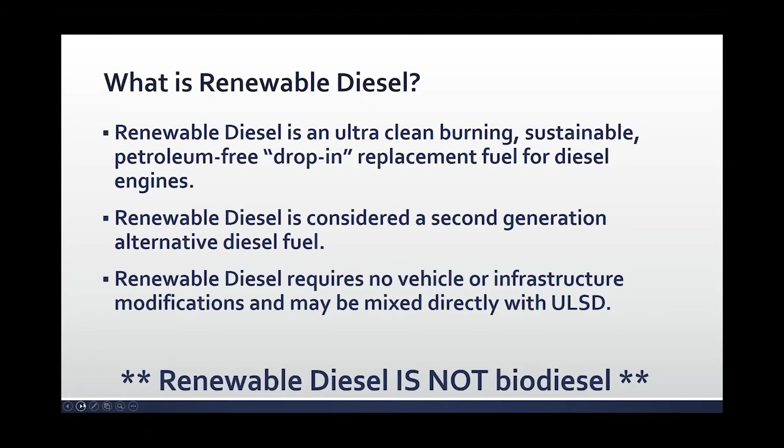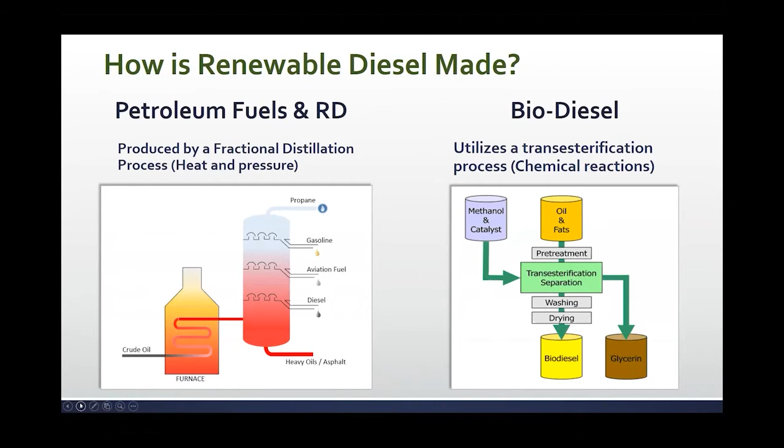But one thing to be clear, renewable diesel's not biodiesel. They're both excellent fuels. Clean Cities is fuel agnostic. There's not one perfect fuel for any situation, but we like to inform everyone about the options that are available to them. The main difference between renewable diesel and biodiesel is the production process. Renewable diesel is made in a more traditional refining process, which uses heat and pressure, whereas biodiesel uses a transesterification process, which is basically chemical reactions. But both fuels are made from the same feedstocks. When I talk about feedstocks, that's just the source of the product that the fuel is made from.

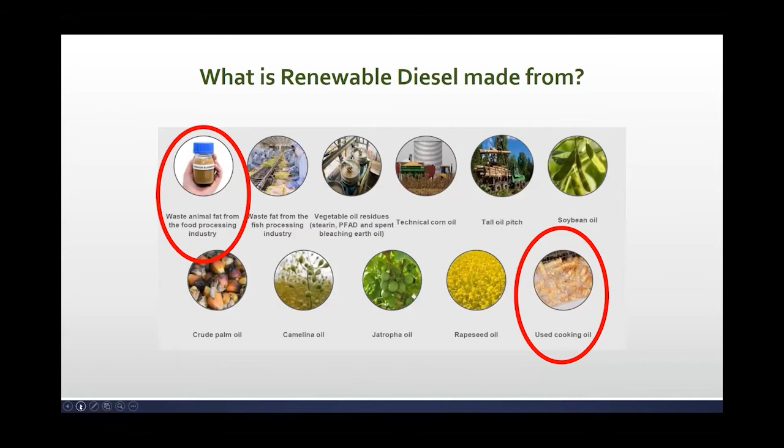These are all common sources of both biodiesel and renewable diesel, but the most commonly available versions of renewable diesel are made from waste animal fats and also used cooking oil. So these are the waste products that don't have a lot of use. Some of these are used to make soap, but it's not taking away from the food supply. There are some concerns expressed at times about renewable diesel made from crude palm oil, and I believe the industry is taking steps to address those concerns regarding deforestation. But currently in California, the low carbon fuel standard has no authorized pathways for fuel made from crude palm oil, so those fuels are not being used in California.

The unique thing about renewable diesel and also biodiesel being made from waste products, it allows an opportunity to engage in circular economy. And this is fundamentally previously known as a closed loop. That's where the waste is produced in an area, converted to a renewable or reusable product, and then brought back into the area for reuse.

In this instance, the City of Oakland is the source of waste, grease, and used cooking oil that is then taken to the renewable diesel refinery where it's turned into renewable diesel, and then that very fuel is returned to the City of Oakland for use in the City of Oakland vehicles. Again, it's a circular economy concept. You'll be hearing more about this in the future.

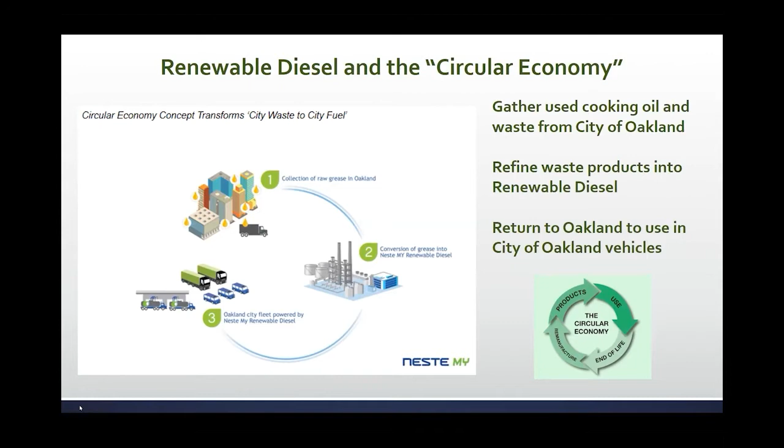Those of you that aren't really familiar with renewable diesel may have some questions. It's perceived as a new fuel. Oddly enough, it's been in use in California in significant quantities for at least 9 years. You can see by the charts, renewable diesel had been introduced into the California petroleum fuel supply as far back as 2011 to meet the low carbon fuel standard requirements of that state. So if you've been using petroleum diesel in California in the last 9 years, you've also been using renewable diesel.

It basically is stating that the renewable diesel fuel supply is projected to increase domestic production capacity, but worldwide, we're anticipated to be somewhere near 3 billion gallons of renewable diesel by 2025. And again, renewable diesel being a drop-in fuel that can take the place of petroleum diesel overnight. The market has recognized this, the petroleum fuel industry has recognized this, and there's significant activities taking place to increase production.

Again, why is this important to me? The graphics on the left are just snapshots that I took out on the street. Renewable diesel's available retail in the state of California, and not just at boutique fuel suppliers. You can see 76 has their own renewable diesel. It's branded 76. The Excel spreadsheet is a table, and it's probably not comprehensive because I made it, but it just indicates the existing renewable diesel capacity.

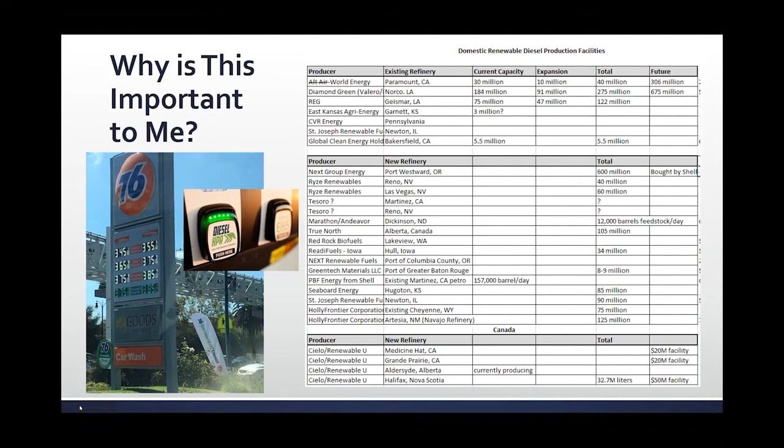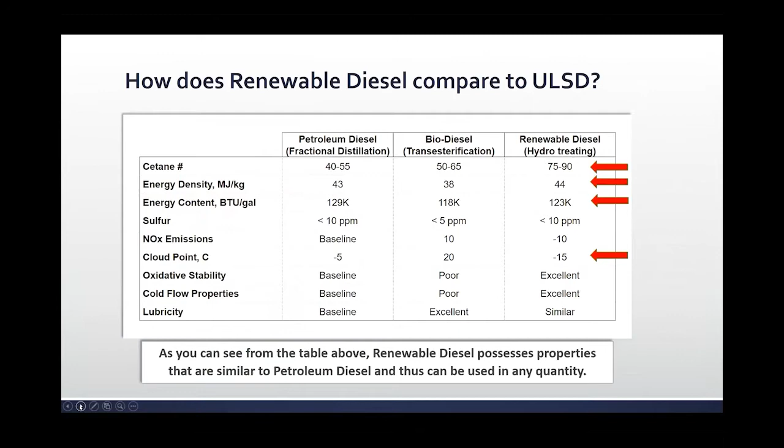How does renewable diesel compare to ULSD, ultra low sulfur diesel? Very similar. You can see the cetane rating above. It's better than petroleum diesel and biodiesel. The energy density is very similar to petroleum diesel, not a significant advantage, and the energy content is quite similar. The cloud point also, with the additives, renewable diesel can be a very good winter fuel, but you have to remember to spec the winter blend if that's the fuel that you want to use.

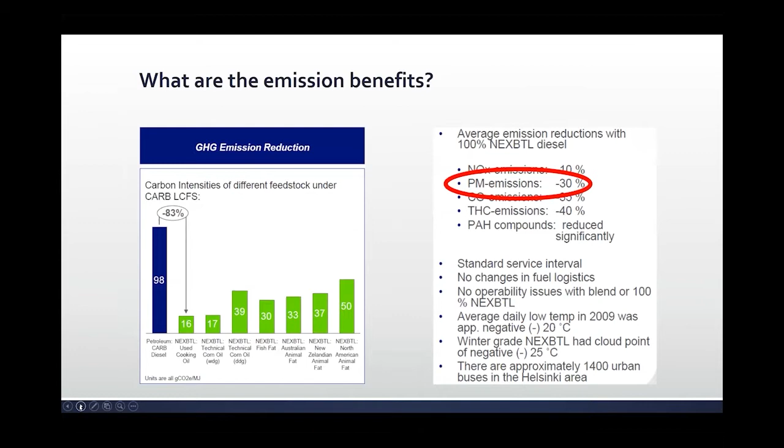And what are the emission benefits? The table on the left shows the blue bar represents petroleum diesel, and the other bars represent renewable diesel from various sources. The one most commonly used in California has a carbon intensity of about 30. So you get right about a 70% emission reduction. But more significantly, the PM emission reduction is at 30%. And that's significant because the particulate matter is a carcinogenic, and it also causes all kinds of problems with your diesel particulate filters.

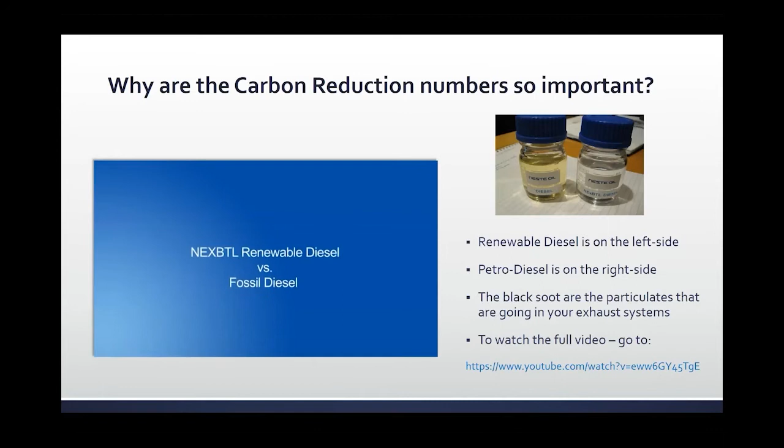So I've got a real quick little video here that visually shows the difference between renewable diesel and petroleum diesel. And these are basically Petri dishes of both products side by side, and you can visually see the reduced emissions from the renewable diesel on the left.

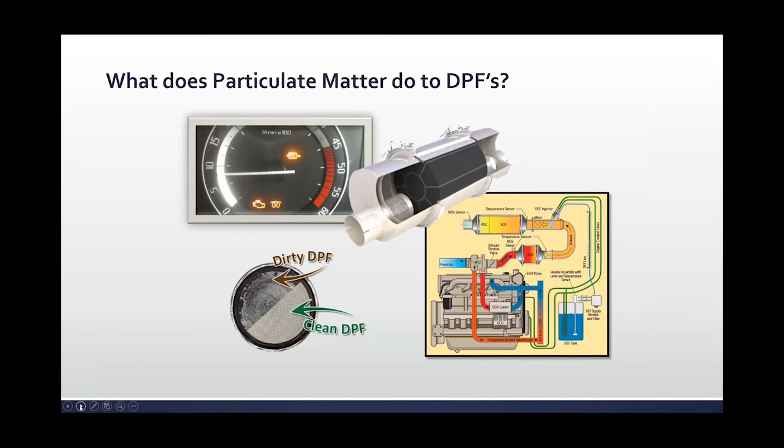So why is the particulate matter reduction so important? Those DPFs and particulate traps on your diesel vehicles are designed to keep the PM matter from entering the atmosphere, and they work by filtering it. So that PM that comes off of your engine gets trapped in your DPF. A 30% reduction in the PM going into your DPF translates to a greatly reduced need to do manual regens and cuts down on your operation and maintenance costs. We will have an additional module in the future that delves into this particular aspect.

So you might be thinking to yourself, hey, this renewable diesel sounds almost too good to be true. What am I missing?

Fundamentally, having been in the alternative fuel industry for about 20, 25 years, this is a once-in-a-lifetime fuel that comes along. There are no modifications required to use in your vehicle or your storage equipment. It's chemically indistinguishable from petroleum diesel, and the same storage and regulatory requirements apply. It cannot void any manufacturer's engine warranty because it is the same chemical chain as petroleum diesel. And it's got very competitive performance criteria such as the cetane and the cold weather clouding point.

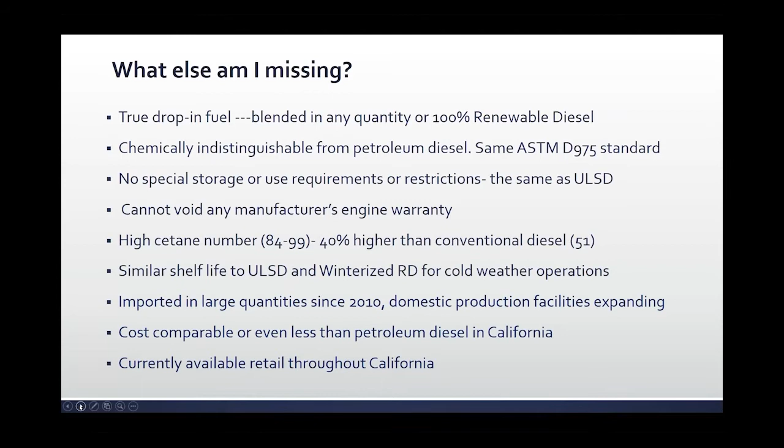It has been imported in large quantities, and to make it even better, in California, renewable diesel is cost competitive with petroleum diesel. In some instances, it's even less. And it's currently available retail throughout California. And let's not forget that renewable diesel can be blended in any quantity with either petroleum diesel or biodiesel. And actually, renewable diesel, biodiesel blends are fairly popular as well, and can actually have a lower overall carbon intensity than straight renewable diesel, depending on the source. So it's important that you do your research when you're making a selection of an alternative fuel to use.

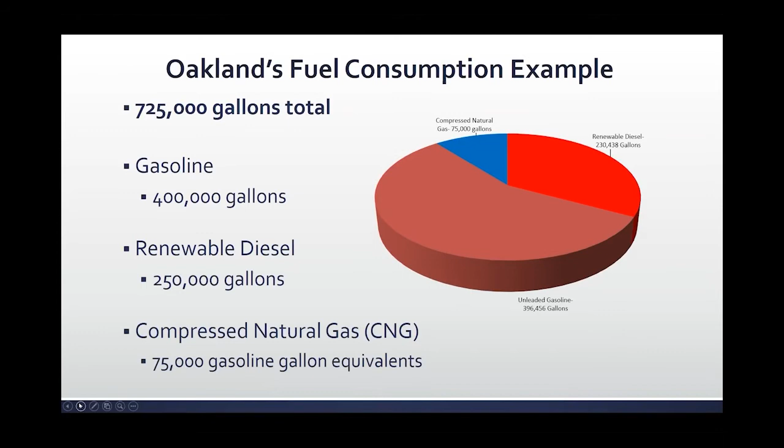Wonderful. Thank you, Richard. That is so inspiring. I especially love the last bit of the slide where you were able to just create a 50% alternative fuel use by popping in renewable diesel. Fantastic. That was a great image.

Up next, we have Dr. David Slade. He's the Executive Director of Biofuel Technology and Services with the Renewable Energy Group. I had the honor of touring that refinery a couple of years ago, and it was so impressive. And the work that they do is so incredible. And the product that they put out is top notch. So I can't say enough good things about REG. So Dr. Slade, welcome today, and thank you.

So thank you again. That was a very nice introduction. Just so everyone knows, we do produce both biodiesel and renewable diesel, and we have been marketing blends of the two successfully on the West Coast for the last couple of years. So Richard set things up perfectly for me. He actually did some of the hard work, and I'm going to build on a little bit of that. We hadn't seen each other's slides, so you'll get a slightly different version of what he said, which will help, I think, fill in the picture for everybody.

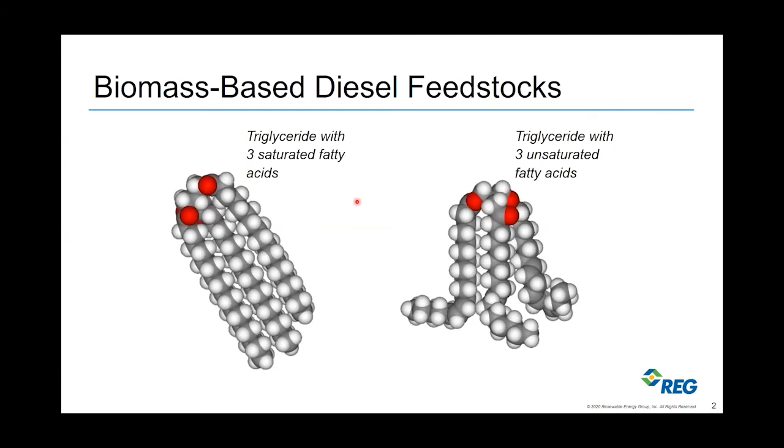So to make biodiesel from fats and oils, we start with triglycerides, and we actually react them with methanol. The reaction that Richard mentioned, transesterification, is a catch-all phrase for any conversion of one ester to another, but we basically convert glycerol esters or esters of glycerol into methyl esters or esters of methanol, and we do that by reacting this triglyceride with 3 methanol molecules.

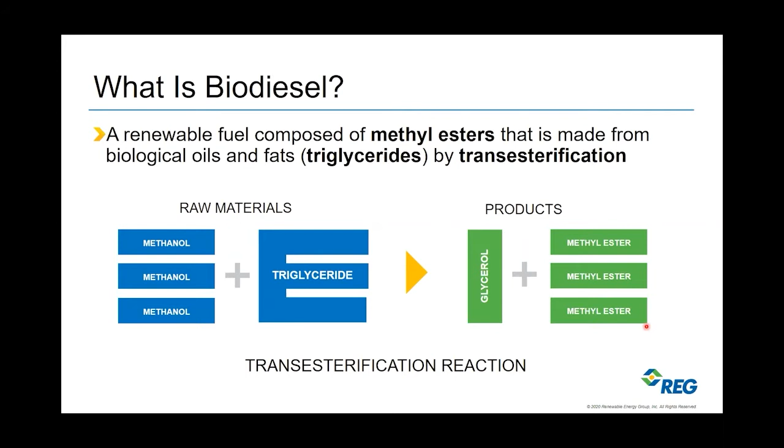The byproduct is glycerol, that has its own uses, and then the methyl esters, which are now much smaller and much lower viscosity than the starting fat or oil, becomes biodiesel or is biodiesel. Here's another molecule picture, and I'm showing you this just so that when we do the renewable diesel slide, you'll understand how we can make such a different fuel from the same starting materials.

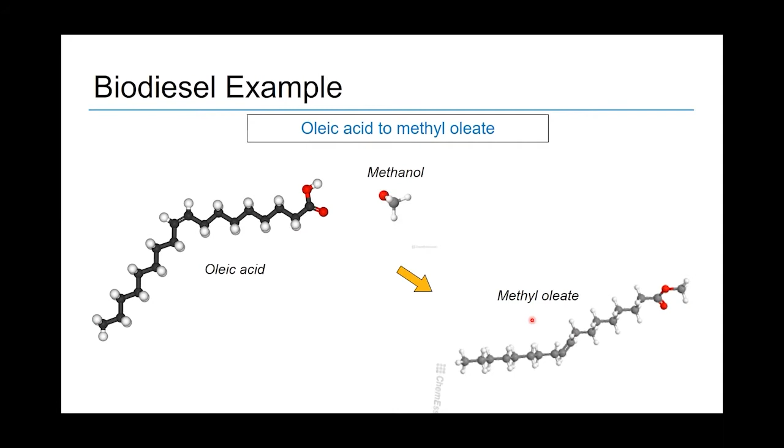So this is a fatty acid, oleic acid. It has oxygen atoms in it, those red atoms, red spheres there. We react with methanol to make a methyl ester. So in this case, it's methyl oleate. That would be biodiesel. We can make biodiesel from any oil or fat, as Richard mentioned, and I'm building on.

And the reason this matters is one of the topics I wanted to make sure to cover today was why biodiesel is different today than it was before, because biodiesel has been around for about 20 years in the US in quantity. And in the early days, we, the producers, didn't know a lot about the finished fuel and what might happen in the world.

And there were some problems, particularly in the 2005 kind of time range, where new adopters of biodiesel did have filter plugging issues. And this was largely because of the minor components, what we'll call minor components or impurities that are in the fats and oils, and those can make it into the biodiesel. So the minor components from feedstocks can impact biodiesel quality. So I don't want to deny anything people have heard about historical issues with biodiesel.

Certainly over the last 10 years, we've made very, very large strides in biodiesel quality. So that's the one thing to reassure everyone today is when we talk about biodiesel that's in the marketplace, it is actually very, very different than what was produced in the mid 2000s and late 2000s even. So quality control has been taken extremely seriously. The minor components in the feedstocks have been dealt with.

There's essentially 2 ways that it's done at biodiesel production facilities. One is by filtration, and the filtration or adsorption options have gotten much better, which means the quality of the fuel is better. And the other one that my company, REG, has been adopting is distillation. So we've been distilling our biodiesel, which makes it a distillate. And this is a very major step in the quality control arena because it gives us fuel that essentially doesn't have any of the minor components that were concerns back in the day.

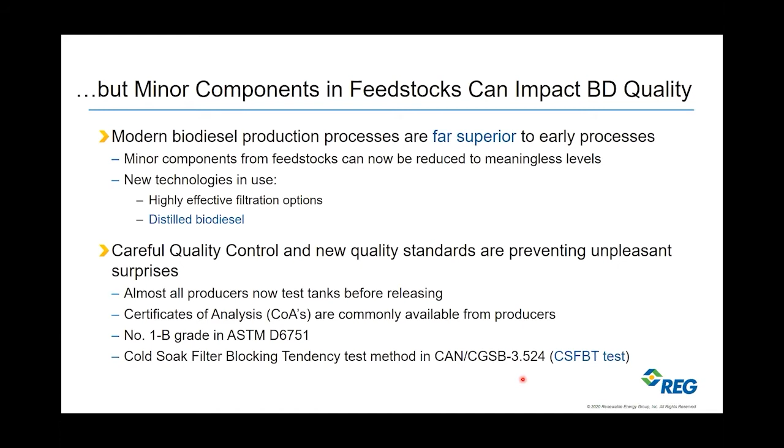It's not in the ASTM method and it's not required, but it is an available test that can be referred to in a purchasing standard. So just know that there is a way to kind of guarantee biodiesel quality control even beyond what ASTM allows. The benefits of biodiesel are mostly related to the fact that the fuel molecules still have oxygen in them. So that gives a different kind of emissions reduction than renewable diesel can offer.

Oxygenated fuels are really good at reducing hydrocarbon emissions because you get such good combustion and because they're not hydrocarbons themselves. And then the particulate matter reductions are even more dramatic than those with renewable diesel. Also very good at reducing carbon monoxide, which occurs when combustion occurs with not enough oxygen. So just know that the fact that biodiesel is an oxygenate actually gives it some unique benefits that we can't get any other way.

And then the other thing that those oxygen atoms do at the top of the molecule is they give it its excellent lubricity. It adds a little bit of polarity to the molecule, which makes the lubricity off the chart. So biodiesel is actually a better way of getting lubricity into your fuel than the conventional lubricity additives, whether your hydrocarbon fuel is petroleum diesel or renewable diesel.

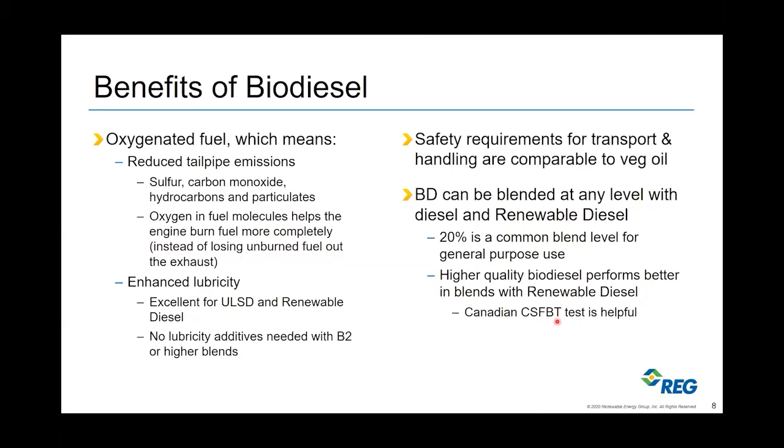Biodiesel is a very safe material. When it's in B100 form, it is essentially vegetable oil from a transport and handling standpoint. And as mentioned by Richard, these three fuels, biodiesel, renewable diesel, and petroleum diesel, can all be blended at any level that the customer wants to use. 20% is a common blend level because that's where the ASTM standard for blended biodiesel stops. But we do have quite a few customers who use more than 20% biodiesel. And once again, I want to highlight that Canadian CSFBT test if you're concerned about biodiesel quality in your blending. So that's biodiesel and the unique benefits of it.

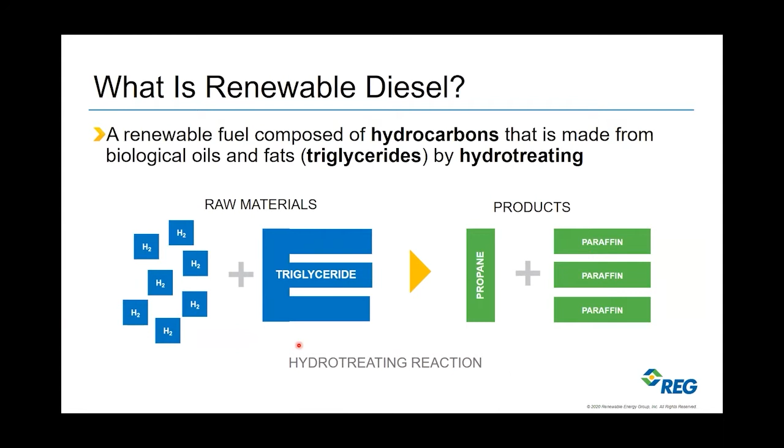Renewable diesel, as Richard touched on, is made from a different process. It's actually made by conventional hydrotreating processes that are used to remove sulfur from diesel fuel. When you react that same triglyceride with hydrogen, you end up making 3 hydrocarbon molecules, in this case paraffins, from the fatty acids. And instead of making glycerol, we make propane. So there is a small amount of renewable propane that's a byproduct of renewable diesel production. Some refineries are set up to combust that on site to lower the carbon intensity of their process. Ours, I believe, is the only one in operation today that was designed to make the propane as a separate product.

Hydrotreating takes that same oleic acid feedstock molecule and reacts it with hydrogen. Our little dumbbells here are hydrogen atoms. When you do that, you remove the oxygen atoms as water. Remember that those oxygen atoms gave biodiesel its unique benefits. But by removing them, you change the molecule into a hydrocarbon. So that makes it identical to the definitions for hydrocarbon fuels in ASTM D975, which is the diesel spec. You also saturate this double bond. I won't go into the detail there, but what it means is this paraffin, as produced by hydrotreating, has a very high melting point.

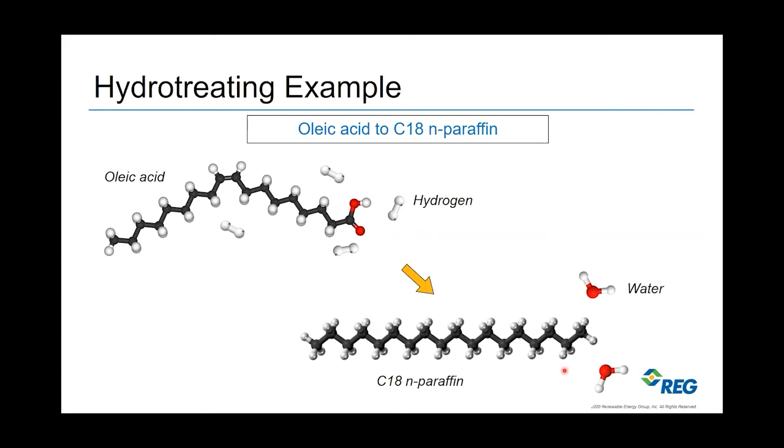So there is a key additional step that has to be done in renewable diesel production. If not, you end up with a very paraffinic or waxy fuel. That last step is isomerization. All the standalone renewable diesel producers today in North America do isomerization as well, which is what lowers the cloud point to the levels that Richard referred to. So crude fat or oil is hydrotreated to make a very clean burning, but very high cloud point material. This is white looking because it's frozen. It's solid at room temperature. But then we isomerize it to make a low cloud point finished renewable diesel.

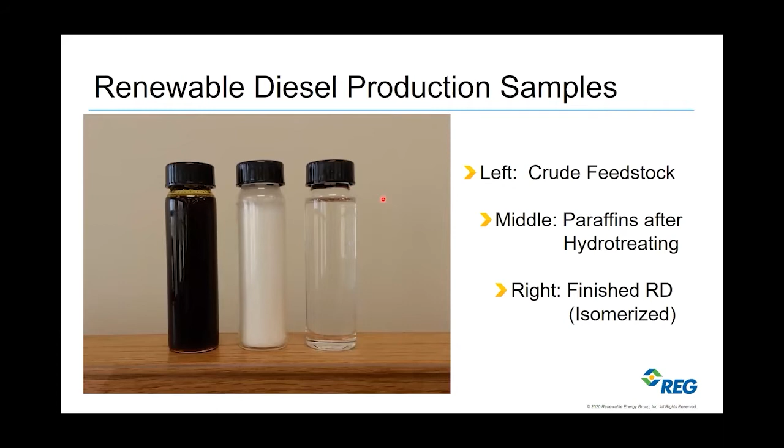So renewable diesel at a high level is categorized as a paraffinic fuel. It's isoparaffins, as I mentioned last slide, but a paraffinic fuel. That's what gives it such a high cetane number. We guarantee it, everyone guarantees it, above 65. In reality, it's closer to 80, or above 80 even, and that cetane number is an indicator of combustion quality. So you get really clean burning, nicely burning fuel.

It's a hydrocarbon fuel. That cetane and the paraffinic, hydrocarbon nature of the fuel gives it extremely low NOx. So biodiesel is better for particulate matter and hydrocarbons, but renewable diesel is much better for NOx. And it also, of course, has very good particulate and carbon monoxide reductions. And it's hydrotreated so deeply it has no sulfur to speak of.

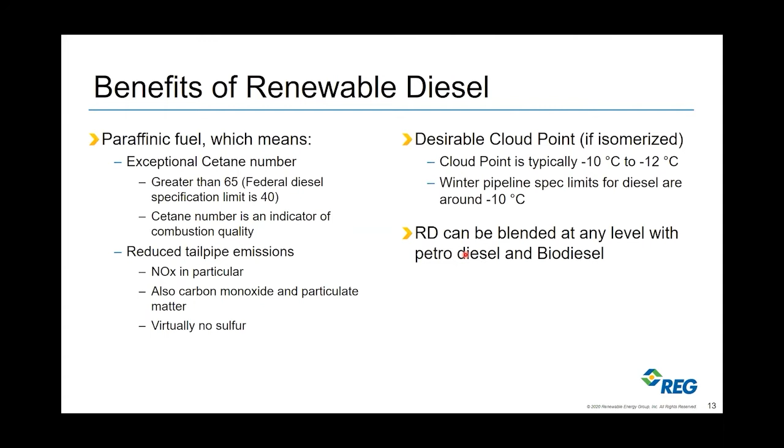Cloud point is very good. Some renewable diesel does go as low as -15 and it can even go lower. Most of the fuel in the market that is moving into California and the West Coast right now is in that -10 to -12 C range, but Richard is correct, it can go lower. And then of course we can blend it with biodiesel. So this is kind of the high level summary slide. We start with animal fats and vegetable oils, used cooking oil, animal fat.

We can react them with hydrogen to make paraffins, which is renewable diesel, or we can react them with methanol to make methyl esters, which is biodiesel. The biodiesel still has the oxygen, and our co-products are a little bit different. Renewable diesel meets the diesel spec, D975. Biodiesel meets the biodiesel spec, D6751.

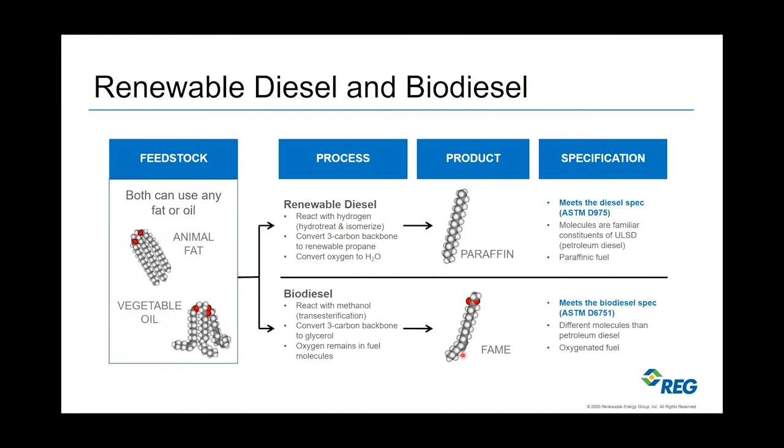So given the fact that these fuels are different and that the molecules themselves are slightly different, even though they're actually really similar in many ways, but that oxygen is a big deal, we thought it seemed like a natural marriage to blend them together, because then you can actually get the benefits of each of them. They are complementary benefits. You can't get the same benefits from renewable diesel that you get from biodiesel and vice versa.

So we have a line of products called REG Ultra Clean or REG Ultra Clean Diesel, which are blends of biodiesel and renewable diesel that are available right now. We have a lot of customers using 20% biodiesel and 80% renewable diesel in California. In Oregon and Washington, we have some customers using 50-50 blends of the two. And then I'll show in these emissions benefit slides what that means.

So when we talk about emissions reductions, these slides are showing reducing emissions compared to petroleum diesel or ULSD. So a bar that's bigger is a larger reduction. Straight R100 is the blue bars on the left. So good hydrocarbon reductions, but the blends, as we add 20% biodiesel and then 50% biodiesel, we get big dramatic increases in hydrocarbon emissions reductions. Now, modern Tier 4 engines have emissions control devices, so this will not represent what comes out of the tailpipe of a Tier 4 engine.

It is what comes out of the tailpipe of an older engine, but it does represent what goes to your emissions control devices in a Tier 4 engine, and Richard touched on that. So we are not sending nearly as much particulate matter to the DPF, and we're not sending nearly as many hydrocarbons to the oxidation catalyst. So there are some benefits just by not loading up your emissions control devices, even for Tier 4 engines.

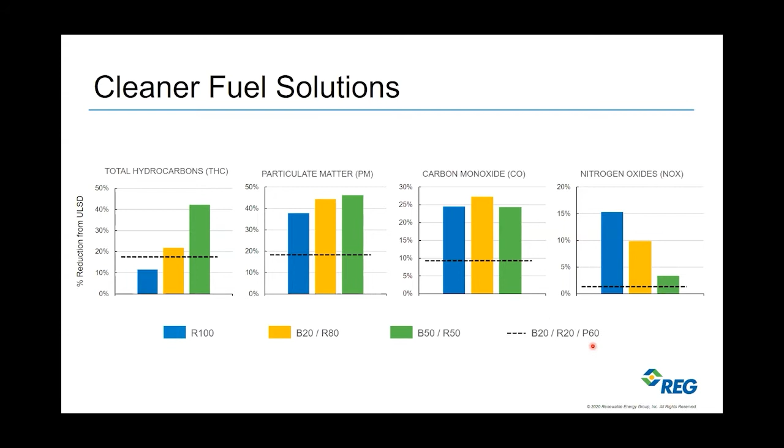And then this dashed line is what would happen if someone were to take 50-50, B50R50, and blend it with petroleum diesel to a B20. So that's a B20, R20, P60. And in markets where there's a premium price for renewable diesel or scarce supply, this could be a very interesting fuel for folks because it's 40% renewable and it has really good emissions reductions, and it's a very nice fuel to use.

Lubricity benefits, the other one I want to touch on here. It's important to note that renewable diesel is a great fuel, but it does have less lubricity even than old-fashioned petroleum diesel. So it does require lubricity additives, just like petroleum diesel. The best lubricity additive out there is biodiesel. At 2%, we get comfortably below the D975 maximum.

And as we approach 20% biodiesel, we actually approach the wear scar value for B100. So really, by the time you get to about B20, you're almost as good as straight biodiesel, which right now is the best lubricating fuel available on the marketplace. So just know that the advantage of this is you don't need additional lubricity additives. Also, by adding a fuel component to provide your lubricity, you do not need to worry about whether that lubricity additive got mixed uniformly throughout your whole fuel supply, because the fuel itself is providing the lubrication.

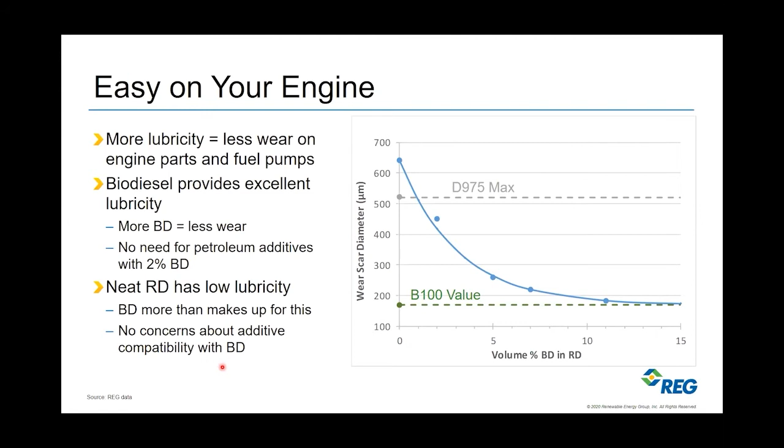And then the last unique benefit I wanted to touch on before I move to my summary is that biodiesel blends with renewable diesel actually have a surprising advantage. We have been looking at REG at freezing point for years as an indicator of cold performance. Cloud point is a very conservative indicator, but freezing point is even more conservative.

When people say, what do I need for my fuel to start it up on Monday after my school bus sits over the weekend? We have struggled with cloud point because cloud point sometimes is a little bit too optimistic. The jet industry, the airline industry, uses freezing point. Freezing points are typically 3 or 4 degrees Celsius or 7 or 8 degrees Fahrenheit higher than cloud points.

So one of the things we realized early on, and it was a little bit dismaying until we saw that we had a solution for it, was that even though renewable diesel has a very low cloud point, its freezing point is actually kind of high. And that has to do with the paraffinic nature of the fuel and the fact that it doesn't have some of the components that diesel fuel has in it.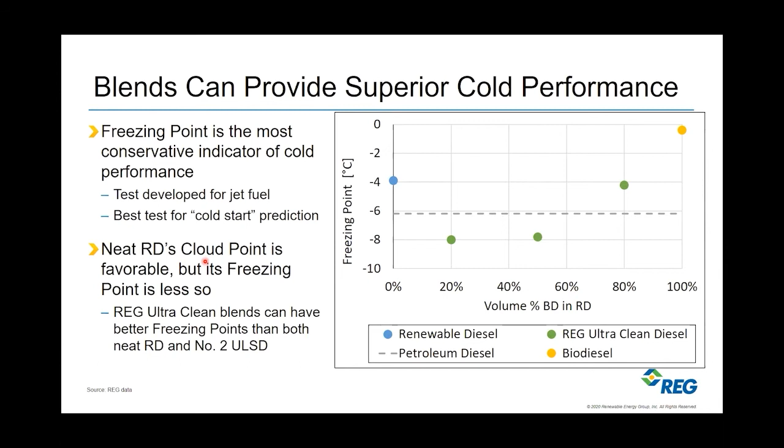Now, this would not apply to all biodiesel, but it does appear to apply to all renewable diesel. So lower cloud point or lower freezing point biodiesel can actually reduce the freezing point of renewable diesel. And that's a very interesting finding. So just keep that in mind, that even though B100 has a high cloud point and is not a good winter fuel for most folks, some amount of biodiesel can actually have a depressing effect on the freezing point. And I'm also promoting the idea of using freezing point as an indicator of your fuel storage concerns.

Final slide here, just know that we have these performance benefits of biodiesel and renewable diesel, that they are synergistic, meaning the two go together. Biodiesel provides great properties for lubricity, also elastomer compatibility, very low PM and hydrocarbon emissions, while renewable diesel is the highest cetane fuel available and amazing NOx reductions. Blend them together to get the best cumulative or overall engine emission reductions. Freezing points can actually be better, surprisingly, than straight RD. And of course, you get that amazing lubricity benefit.

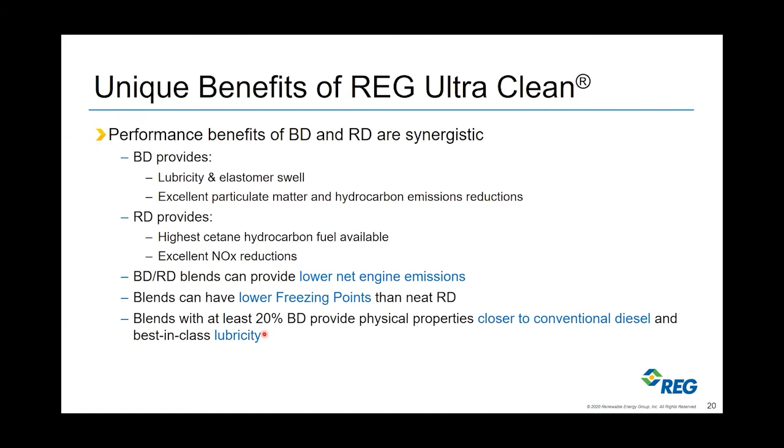And you know what? I remembered I do have one more, because I think of emissions usually as tailpipe emissions or engine emissions, but greenhouse gas emissions or carbon intensity reductions is what people on this call I think are really interested in as the Clean Cities folks. So this is the same kind of information that Richard showed, just broken out in a little bit more detail to compare to different transportation options.

So petroleum diesel in California has a carbon intensity of approximately 100 grams of CO2 per megajoule. Best in class biodiesel for REG at least, we have a 12, which is an 88% reduction. Our renewable diesel is 19, which is an 81% reduction. This depends on feedstock and production technology, so it's certainly possible that renewable diesel could have better scores than this from other producers. But just know that these are both above an 80% reduction versus petrodiesel. Natural gas is not a renewable fuel, but it does have lower carbon because it has more hydrogen in the molecule. It provides only a 21% reduction versus petro.

And electric vehicles, at least with the current US grid, are actually not better than biodiesel and renewable diesel. That's the main thing to show here. Now, there could be jurisdictions like the state of Washington where they have a lot of hydroelectric power and your electricity is renewable. Of course, that would lead to a larger reduction. But the current US grid average gives approximately a 34 carbon intensity or a 66% reduction. And that's actually with a favorable EER of 5. So just know that that's a favorable number. That is not putting the thumb on the scale there.

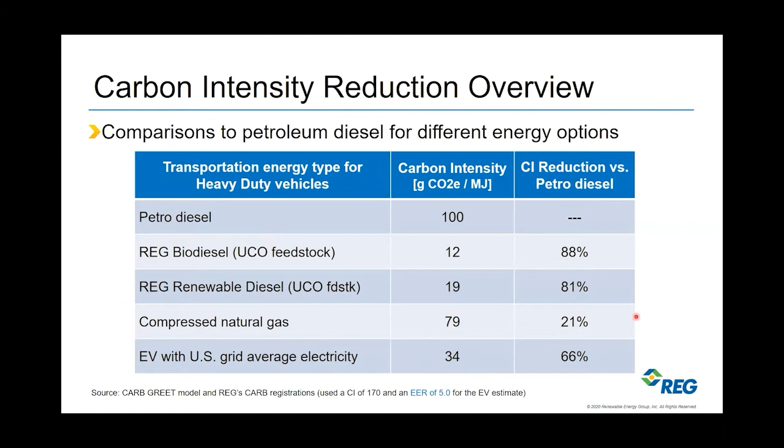Dogpatch Biofuels is San Francisco's only LBE and WBE renewable fuels provider. We have multiple commercial card lock. We have on-site construction fueling and wet fueling for both public and private fleets.

What really sets us apart from our competition are two things. First, we specialize in renewable fuel blends and always have. So we're not a company you can come to and necessarily get petroleum products.

And secondly, Julie Ginsburg and I own a company called Incredible Adventures. Incredible Adventures is an adventure tour and travel company that has a large segment of transportation services. We've been running that company since 1999, and we've been running on 100% non-petroleum fuels since 2000.

So if you recall, David talked about the years of biodiesel, so to speak, and all the different challenges that people had going through them. We were a fleet running that fuel back then. And again, I would like to reiterate that the quality of the fuel that you're putting into your vehicles, whether it be today or yesterday, is really important. We monitored that all along, so we did not see the issues that most people saw over the years.

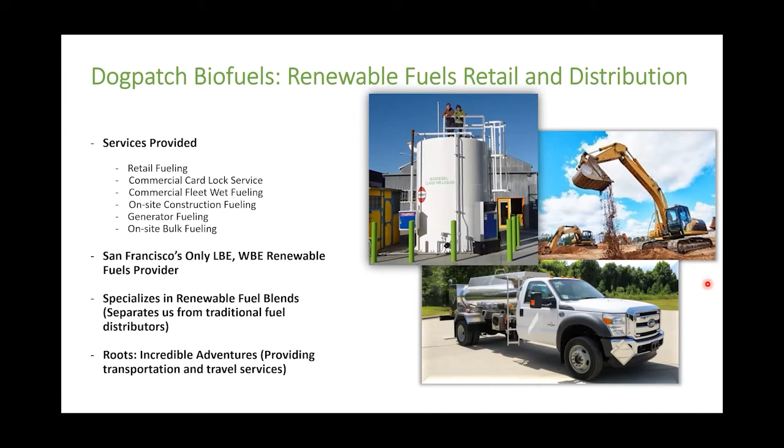So I'm just going to do a quick overview from our perspective. As a company based in tourism, one of our key components was looking at the environment and making sure we could do the best we can to keep it looking pretty for visitors for years to come and even our grandchildren. For us, one of the biggest components of that was our carbon footprint. Before people were really talking about carbon footprint and sustainable travel, we knew it was an issue, and we wanted to reduce our emissions, as that would be the most important thing we can do.

So of course we looked to alternative fuels to do that. At that time it was biodiesel, and we're still a heavy advocate of biodiesel because of the emission profiles pointed out by other speakers today. As you can see, the emissions we were looking at, which I think Dave and Richard did a good job of talking about, are listed here in this slide.

Also, as a fleet owner and distributor, one of the things we want considered when looking at renewable fuels is how we can increase the supply. That's not talked about a lot today, but as you saw on Richard's slide, there's been a significant increase in people using renewable diesel, tightening up that supply. From a blending perspective, I see an opportunity not only to increase that supply, but also to rely on domestic resources to do that.

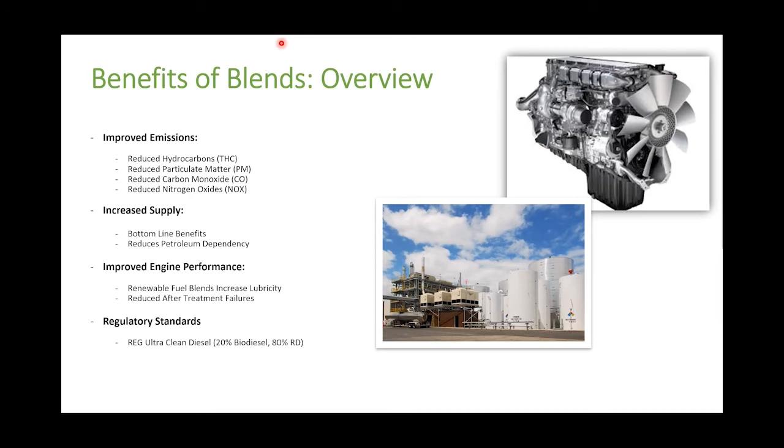as well as distribute it through Dogpatch Biofuels. So this is a slide that's provided by REG, and I just wanted to talk about this because I talked a lot about biodiesel and why we thought it was important. In 2016, we were also quite disappointed because we were happy with the fuel. We thought the quality had gone up pretty good. Our customers were happy with the fuel,

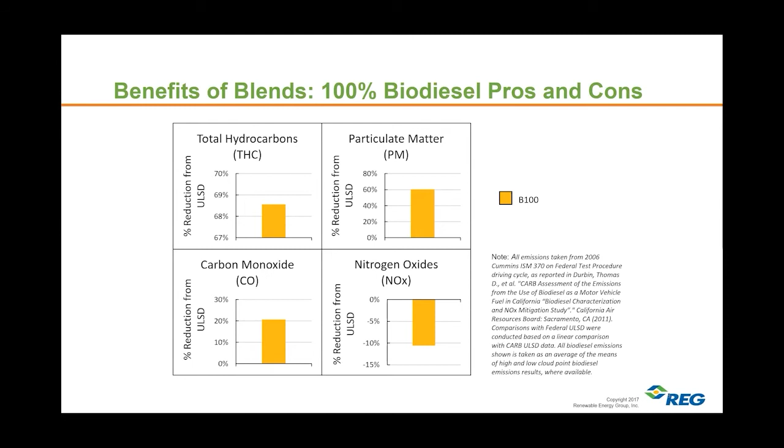and we liked that the emissions profile on it was so significant on everything but NOx. And we thought that the reduction in hydrocarbons and particulate matter and carbon monoxide outweighed the potential of NOx problems, especially since all of our vehicles at that time had mechanical mitigation, which was going to reduce the NOx anyway. However, that's also what gave us a hesitation to go into 100% renewable diesel, because as you'll see in the next slide, that is the slide that Dave showed us earlier.

Although there is a significant reduction in hydrocarbons, particulate matter, and carbon monoxide, it's not quite as significant as biodiesel. And we were trying to have the best reduction that we can. Now, of course, we were happy about the impacts of NOx, and so this helped make our decision on how we were going to use our fuels, why we were going to use our fuels, and how we were going to do it. Especially because the other major factor was, are we buying domestically produced fuels?

There's also been a lot of conversation over the years about renewable diesel not being able to be mixed with biodiesel. And like I said, we weren't interested in 100% renewable diesel because of the emissions profile compared to biodiesel, in our opinion. And so we wanted to make sure that we could get the best fuel possible. And so we started blending in our in-tank site at our facility, and I'll explain about those blending logistics a little bit later, and why it's important from a logistics standpoint for your company, and not having to have the headache of blending in tank.

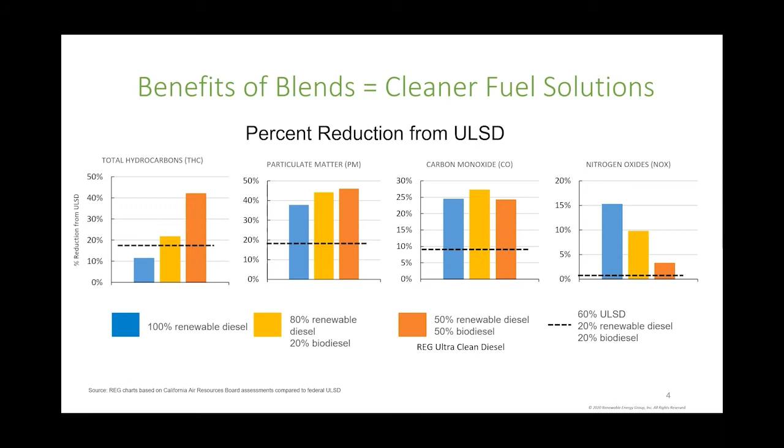Now, that doesn't necessarily reflect the amount you're going to be able to buy your fuel at, because each distributor will have their own models, and that'll largely be based on volume. So are you using 250 gallons a month or 50,000 gallons or more a month? We also, like I talked about earlier, saw a significant benefit in blending the fuels to increase supply and keep our costs down, and that was helped in December of 2019 with the extension of the blender's credit.

Some additional considerations, some of which we have talked about, is that we can help support domestic energy production. For us, this is really important as a company and to our core values to create jobs, especially jobs in areas that have lost jobs over the years in the blue collar sections of our country, and turn those into green jobs. And again, I talked about earlier that we are largely promoting energy independence, which was important for us at Incredible Adventures because we were in our second year of business at the start of the Gulf War in 2001 after 9/11, which had a major impact on our business, and we wanted to do everything we could to not have to rely on foreign entities for that.

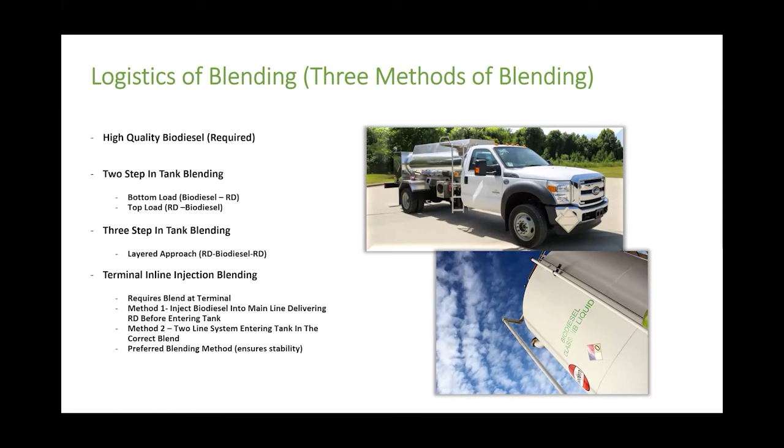And if you're using a high quality fuel, along with either regular diesel or renewable diesel, it allows you to maintain those products in solution much better than in-tank blending.

And so, I wanted to, again, thank everybody for joining and all the really detailed information we got from Richard and Dave so far. It really explains a lot on the technical aspect, and I hope that I was able to demonstrate to the group that picking your distributor is important, picking your producers for biodiesel and renewable diesel or even petroleum diesel, and having it pre-blended and delivered at your site or in whatever use you're having really saves you cost in the long run.

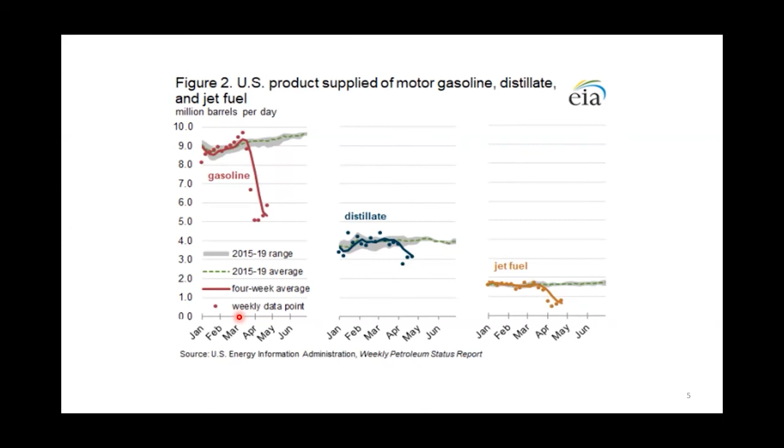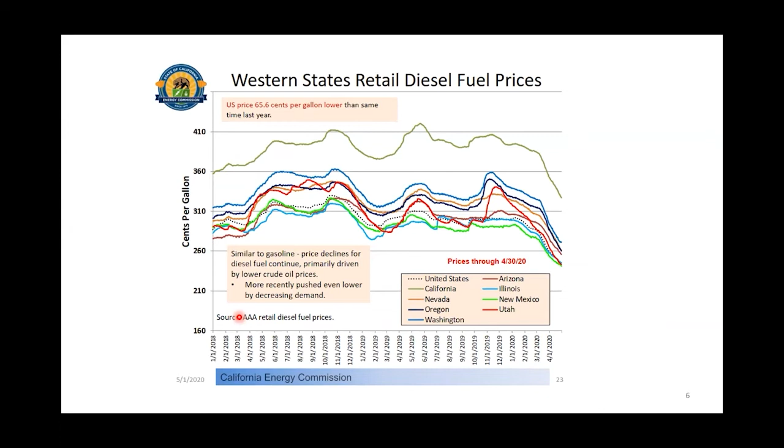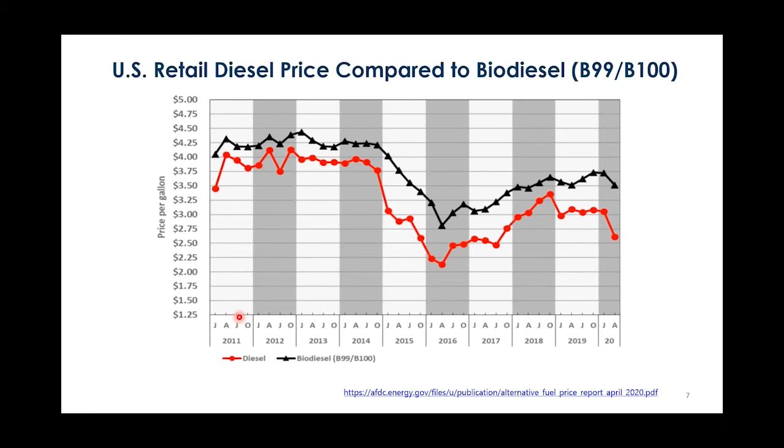And this is US retail diesel price compared to biodiesel B99. Most of the fuels do track fairly well, even though it's different commodities, different everything. But because it's blended in and demand all kind of fits together, they do fairly much follow each other. So at this point, I'd like to really get into what we want to talk about here, and that's the biofuels.

There are several policies in place, and diesel is where we're going to focus, biomass-based diesel, which is both renewable diesel and biodiesel. There are several incentives and policies that are changing this whole marketplace, particularly out here in the West. The first I want to talk about is the federal RFS. This has been around since 2005, and then in 2007, they added to it and made it stronger.

So renewable diesel gets about 1.7 RINs, and it's 1.5, I believe, for biodiesel. So at the current market price of about 50 cents a RIN, renewable diesel is getting about 85 cents, and biodiesel is getting about 75 cents a gallon.

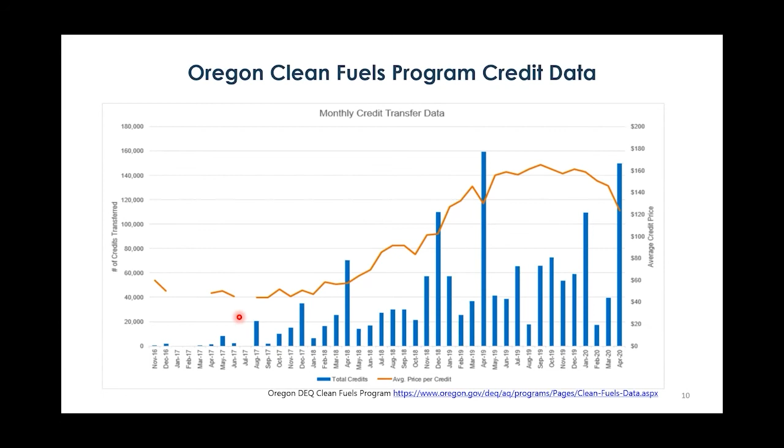In 2020, it would take about 117 gallons of RD, renewable diesel, to generate 1 credit, a 1 metric ton reduction. So that would be about $1.11 a gallon. So you put all 3 of these things together, and these producers or blenders can get about $3 a gallon when you add them up.

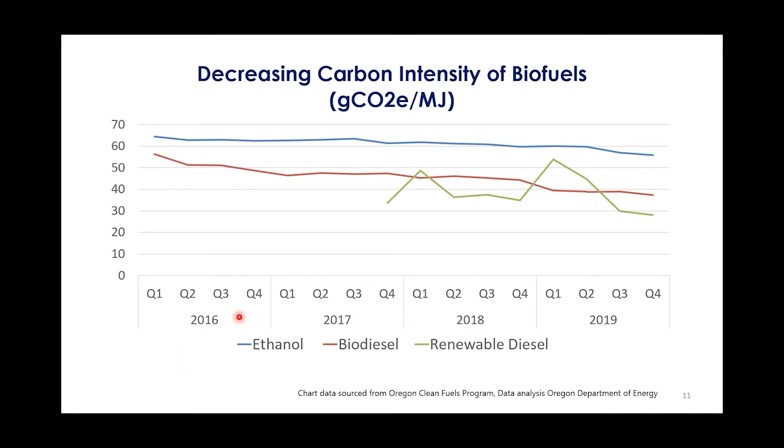The interesting part about the programs and the market signals we're sending out is we're seeing a reduction in carbon intensity. Ethanol's reduced about 13%, biodiesel 34% over the last 4 years, and renewable diesel's reduced about 16% over the last 2 years in carbon intensity in the market. Now, as far as gallons, we've also seen a lot of gallons increase into the state.

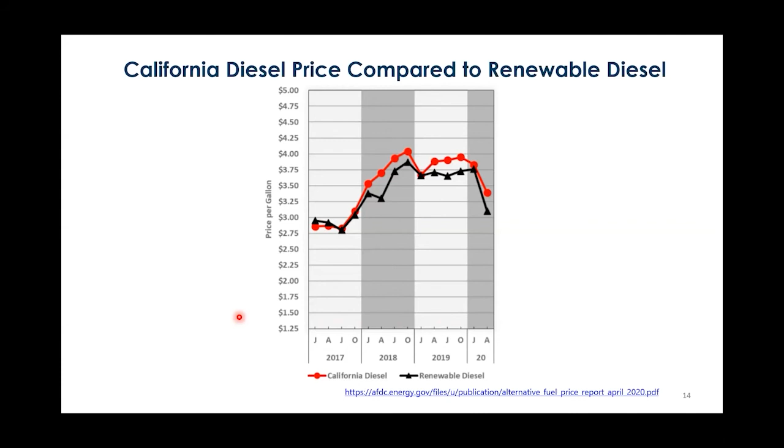So key takeaways. Impacts from COVID have reduced demand, and the oil industry was unable to adjust supply quickly to balance the sector. Less demand and oversupply have caused crude prices to fall. Of course, this has affected everything else. Diesel demand is not anticipated to recover till later this year or next year. Biofuel prices tend to track these. Multiple federal and state policies are increasing the availability and pricing competitiveness of the overall market on the West Coast.